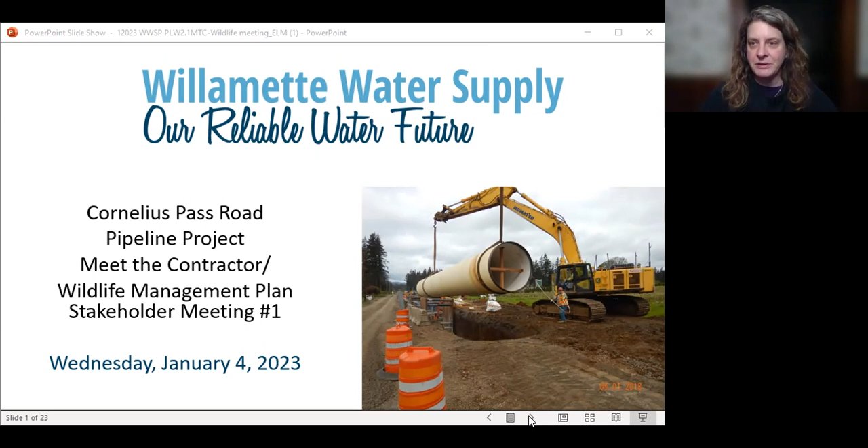This is the Cornelius Pass Road Pipeline Project Meet the Contractor combined with the first Wildlife Management Plan stakeholder meeting. It's Wednesday, January 4th, 2023. Happy New Year. Okay, next slide.

So just a quick rundown of our agenda today. We are going to just talk for a second about meeting tips and protocols in case anyone needs a quick Zoom refresher. I'm going to give a little overview of Willamette Water Supply in case there are some new people who don't know what our project is about. We're going to introduce our team. We have our project manager here who's going to talk about the scope of the project and talk about some early activities that will likely be happening this month in January and how to stay informed as the project moves ahead. And then we'd really love to get through our presentation and then answer questions at the end.

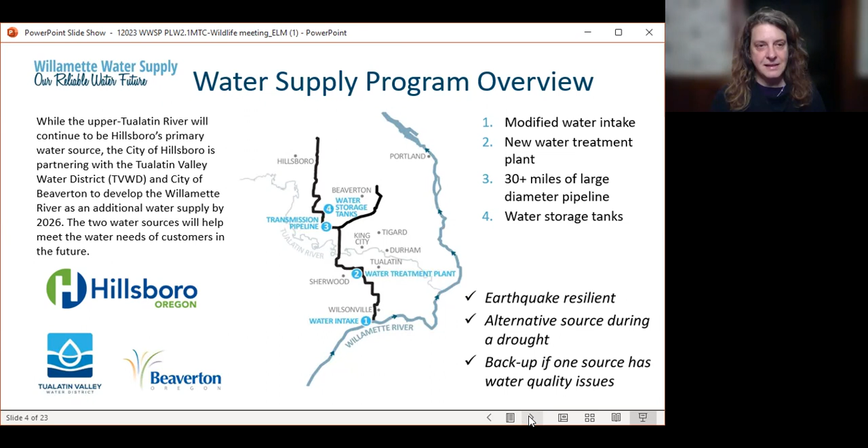So I'm going to ask each of the people listed here to introduce themselves. Again, I'm Marla Smock, and I lead communications on the Willamette Water Supply Program. And we'll just go down the list, starting with Erica. Hi, everyone. I'm Erica Murphy. I am the project manager for this stretch of the pipeline project. I was involved throughout the design phase of this project, and I will be heavily involved throughout construction as well as project manager.

All right, hopefully everybody can hear me. My name is Sean Fackrell. I am the project manager for Moore Excavation. Currently, we have a handful of projects related to the Willamette water program, and I'm on actually one other project out in Tualatin. So we have some experience on this.

Hey everyone, Kyle Butler. I'm the construction manager for Willamette Water Supply Program. So I'll be working hand in hand with Sean and the MEI team out on the construction site and also with Erica as well.

And Phil is last. Phil? Yeah, hi, Phil Rickus, ecologist with David Evans and Associates, and been working with water supply here for about a decade now. Nice to meet you guys. Okay, next slide.

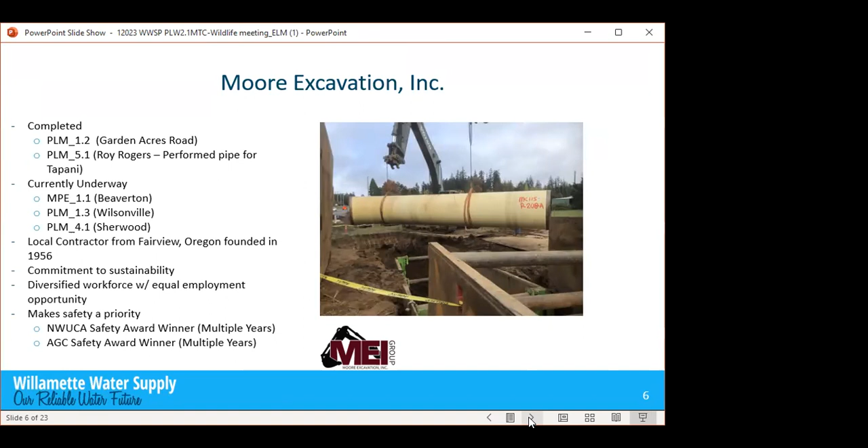I can do a quick highlight. We've completed 2 of the jobs listed here. We did one, it wasn't my job, but it's Garden Acres and a Roy Rogers one. We've finished those. We currently have underway 3 projects: one out in Beaverton, one in Wilsonville that's just getting started, and one in Sherwood, our 4.1 job that I'm involved on. That one is about 50% pipe installed.

A little bit about Moore is that we are a local contractor out of the Fairview area. We've been around since 1956. We are a diversified workforce, equal employment opportunity, just a couple boilerplates, but we are also a very safe company. With some of these deep excavations, safety is one of the biggest stresses, and making sure that our shoring's up to par, but we do have a very good track record. So hopefully that helps, that we will be looking out for the public's interest as well as obviously the safety of our employees.

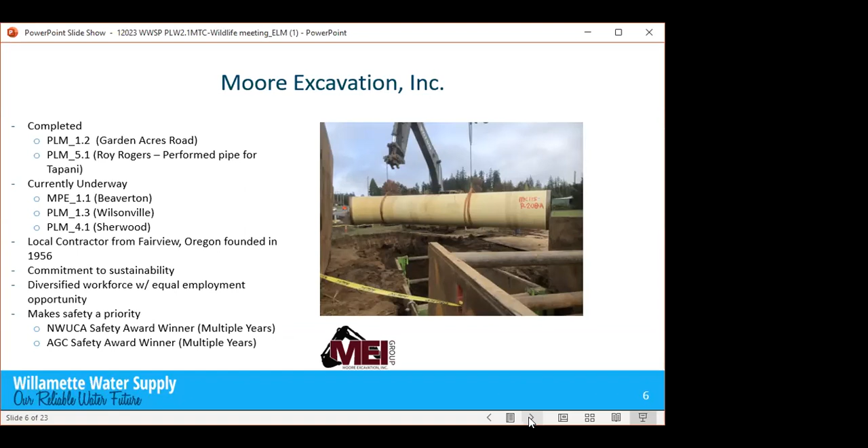Great, thank you, Sean. Next slide. So now Erica is going to start a little description of the overall scope of the project, and we'll continue through our PowerPoint.

All right, thanks, Marla. So what we're talking about now is PLW 2.1, which is the pipeline stretch that is going into construction shortly. You may have heard about PLW 2.0 recently, and that was a bigger project that has now been split into 2 smaller projects. As you can see on the graphic on the right, the area shown in blue is the portion we're planning to construct now. But north and south of this pipeline, shown in black, the schedule is currently to be determined, but that will be constructed at some point in the future. That is in the Cornelius Pass Road right of way.

So starting at the south end of our project, PLW 2.1, where the number 5 circle is at the bottom, we're installing about 900 linear feet of 48-inch welded steel water pipeline through Orenco Woods Nature Park. We're skirting along the east portion of the park. We cross what we call a trenchless crossing underneath the TriMet light rail tracks, so we don't have to disturb the tracks at all during construction.

Moving north, we are in the Cherry Lane Fire Station property, and we are also using this area as a staging area, where the job trailers will be placed, as well as materials and equipment storage throughout construction. Continuing further north, we have about 1,800 linear feet of pipeline within the former ODOT rail right-of-way, or what we call the berm property, currently owned by the Willamette Water Supply Program. At both the north and south ends of the project, we're installing the pipe into Cornelius Pass Road, so that in the future, when we tie into both ends, we will be entirely within the right-of-way for construction.

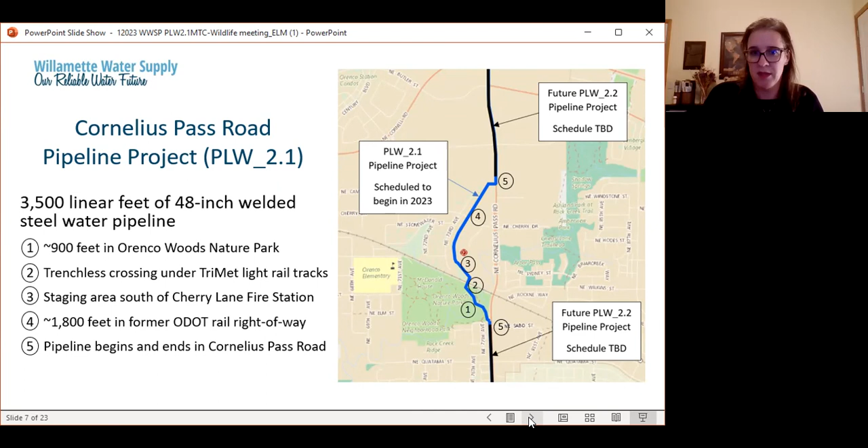Next slide, please. The current construction schedule as it stands is subject to change. I know Marla will talk about this later, but we will have monthly updates, and that's where we will communicate any scheduled changes as construction progresses.

The first activity happening is vegetation clearing in Orenco Woods Nature Park. That is scheduled to begin later this month. Some of you may have seen the notice; we're doing that in January. It's actually for the birds, and we're trying to minimize disturbing any nests, so doing the work before February 1st is preferred for the wildlife. We do have some early vegetation clearing in the park, which will set us up for construction of the pipeline in the park later this year.

The staging area, which I mentioned, is in the Cherry Lane Fire Station property, kind of south of the existing fire station. We will begin staging, mobilizing onto that site in February of this year. Pipeline construction will begin in Orenco Woods Nature Park starting in June this coming summer. Also, we will begin the TriMet light rail crossing in June as well.

At this point, we are looking to do the work in the park first and then move north of the TriMet tracks, which will put pipeline construction in the ODOT right-of-way property about early 2024. In order to be ready for that work, we will need to remove the trees in late summer or fall of this year. We'd like to do that in the dry weather; it's quicker and it's safer. So that is the current schedule: remove trees this late summer and fall, then begin pipeline construction at the beginning of next year in that property.

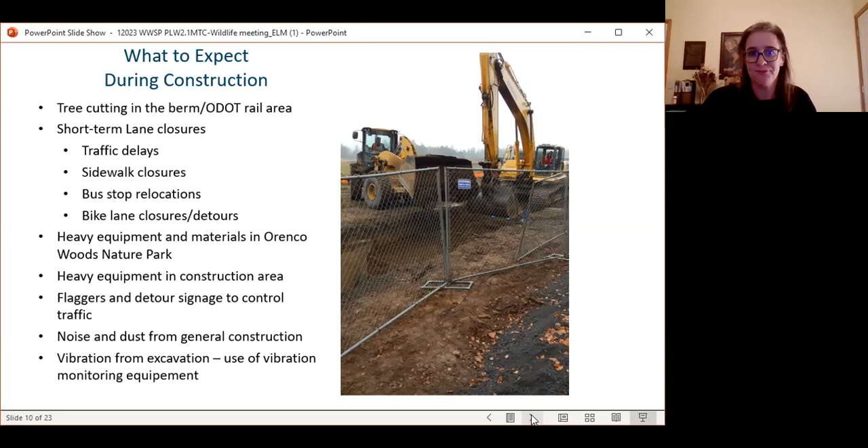So like I mentioned, some traffic impacts. We worked extensively with Washington County during the design phase, mostly for the Cornelius Pass right-of-way work. We're trying to minimize impacts to the traveling public, maintain safety for all users including passenger vehicles, bicyclists, and pedestrians, maintain access to adjacent neighborhoods and businesses, and provide emergency vehicle access at all times.

This is especially important since we have the fire station in the middle of the project. As mentioned before, there is potential night and/or weekend work anticipated just at the very north end of the project, within the Cornelius Pass Road right-of-way. We have no closures anticipated on Cherry Drive, because of the emergency vehicle access coming to and from the fire department.

You can expect minor delays while there is construction actively in the roadway. We expect up to two weeks of construction within the road. But there will be a flagger on site to allow immediate access for all emergency vehicles and ensure there are no delays. Next slide, please.

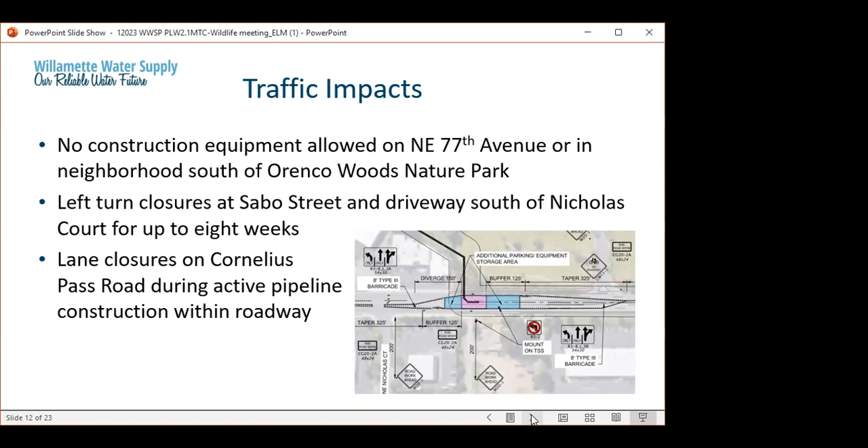but we will not allow construction equipment on those narrow streets. We have left turn lane closures planned for Sabo Street at the south end of the project, and also there's a driveway south of Nicholas Court at the north end of the project, potentially closed up to 8 weeks while we're installing pipe within the Cornelius Pass Road right-of-way. We will work with any businesses or residents that would be affected by that lane closure. Lastly, we expect some lane closures throughout the day on Cornelius Pass Road while active pipeline construction is happening in the roadway.

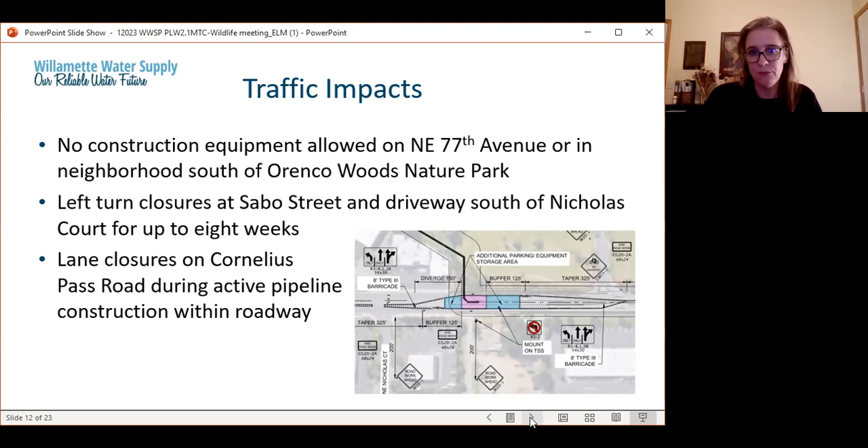So, some general construction activities: most of the pipe will be what we call open cut pipeline construction, where we dig a large trench with an excavator. Like Sean mentioned, we have shoring installed in all of our trenches for the safety of our crews. We have 50-foot sections of pipe that will be installed. The pipe sections are placed in the trench and then welded together, and then the trench is backfilled with materials so it looks similar to how it looked before the pipe went in the ground. Next slide.

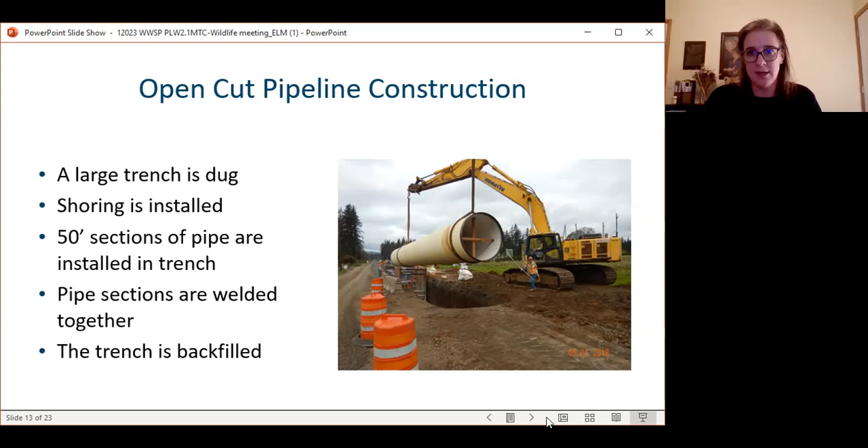When we get to the TriMet light rail crossing, we can't open cut that because it would disrupt service on the light rail. So we're doing what we call trenchless pipeline construction, where deep shafts will be dug at the north and south ends of the tracks. Then we install this boring machine, similar to the one shown there on the right.

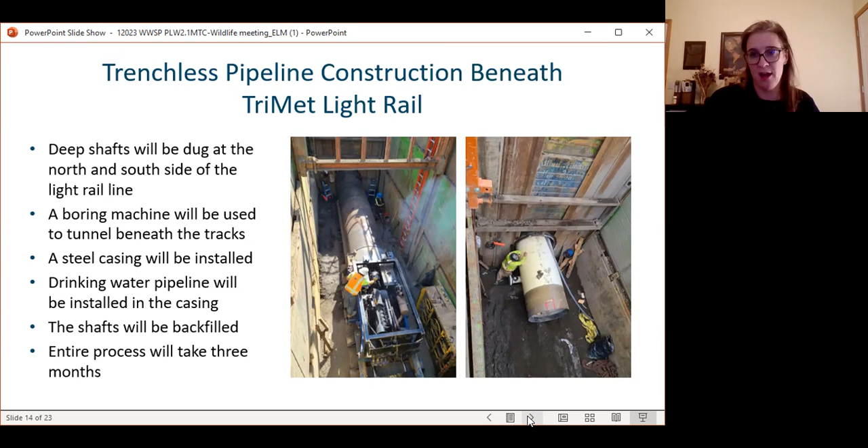We install a steel casing, a 60-inch steel casing underneath the tracks, and auger bore that through. Then we put the 48-inch steel pipeline inside that casing pipe. Then we fill all the voids, and fill in those shafts at the north and south ends of the tracks. That entire process takes about 3 months from the time we start excavating the shafts to the time everything is backfilled, and that's one of the first activities we have planned for the project this summer.

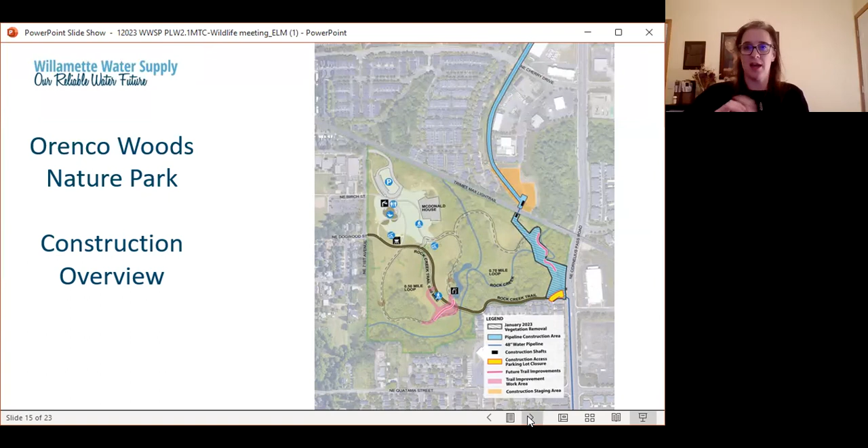Hey Erica, yes, I think the next slide is a blow-up of this. Would that be better? Yes, let's do that. Go to the next slide. Yeah, thank you, Marlis.

So that blue area there on the right is the pipeline work zone. We have up to 12 months we expect to be in that blue work area. A lot of the work is going through Rock Creek in that area, as well as the trenchless TriMet crossing, as well as just installing the rest of the pipeline in that area. We are hopeful that it will be quicker, but we do have up to 12 months in our schedule to complete that work.

Like I mentioned before, access to the park will only be from Cornelius Pass Road. The area shown in yellow is the construction parking lot at the south end of the park. That parking lot will be closed for the duration of construction so that we can maneuver vehicles in and out of the site without having to drive through the neighborhood south of there. There will be a fence around the parking lot to limit access during construction, and there will be signage in place as well.

In addition to the pipeline work in the park, we're also doing some trail improvements. This was an agreement with the owners of the park to increase accessibility of the trails in wet weather and to also protect some of the wildlife in the wetlands there. The areas shown in pink are the trail improvements. So once the pipeline work is complete in the park in that blue area, we will be doing trail improvements in the pink.

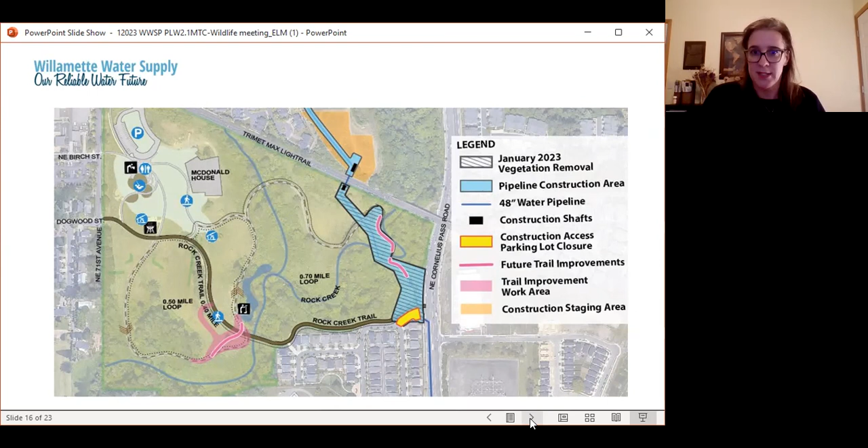While we are working in the park, we do have some trail closures planned and some detours. We want to be sure to keep pedestrians safe from construction, as well as wildlife, which Phil will talk about a little bit later. The first activity is the vegetation clearing later this month.

At that point there will be some temporary trail closures near the blue area on the right side of the park. We will have signs posted and give notice prior to any trail closures. The area in blue will most likely be closed for up to 12 months.

So that parking lot and the trail that goes over that eastern bridge over the creek will be closed for up to 12 months, starting most likely this summer.

We do have temporary detours during construction, including, if you can see the dashed line on Cornelius Pass Road at the very far right of the graphic, that's part of the trail that goes through. In order to avoid the construction area, there's a pedestrian detour to go around it and get back to Cornelius Pass Road.

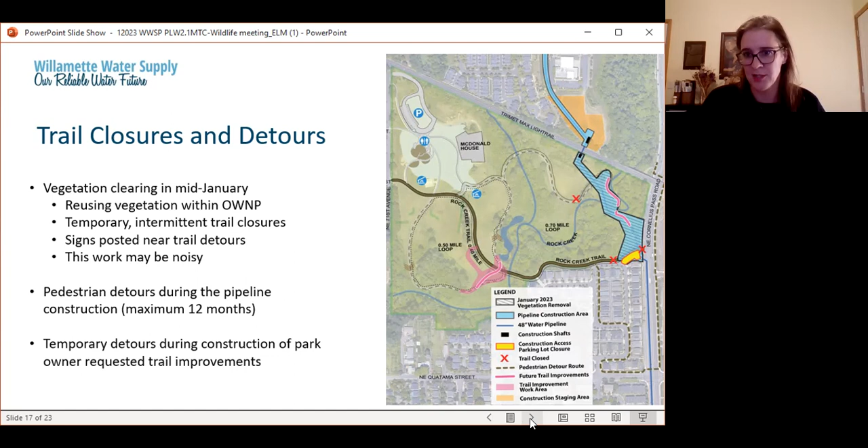Next slide, please. I'm going to pass it over to Phil to talk about the wildlife protection measures in place. Hello.

Essentially, we've created a plan to outline the methods to be taken to protect wildlife throughout the park during construction, and to fulfill the commitments for water supply. Is there a next slide, please?

Some of the highlights of the plan are to minimize the duration of construction, physically limit the extent of impact at any given time, provide for large mammal passage, protect amphibians along Rock Creek corridor, and recover wildlife as needed to salvage them from the work areas. Next slide.

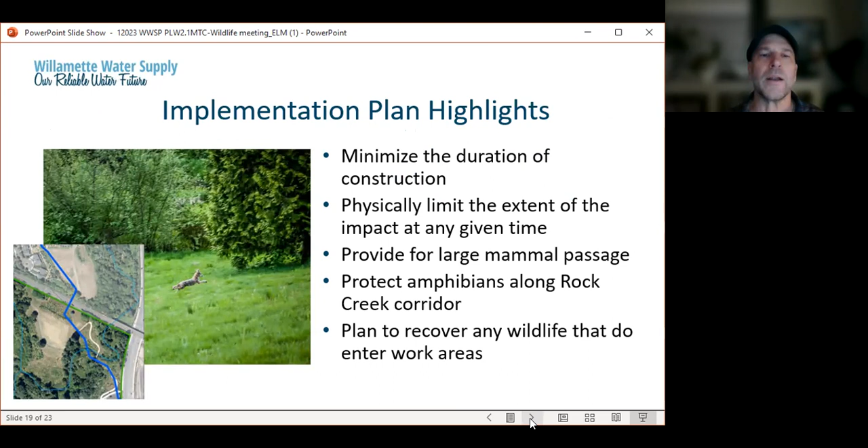I think this one is Phil's. Thanks. So I just wanted to talk for a minute about the best way to keep informed about our project.

I know most of you on this call are already signed up for our monthly email updates. I recognize your names. And if you have neighbors or know people who aren't already signed up, please sign up through our website, or you can send me an email.

We also have an extensive project website available, and this meeting will be posted after the fact to that website.

We are also having regular wildlife management plan stakeholder meetings, about every three months, to talk more about what's about to happen on the project and what we're doing to protect the wildlife and the habitat. The date of the next meeting is not yet scheduled, but as soon as we have it scheduled, we will let you know.